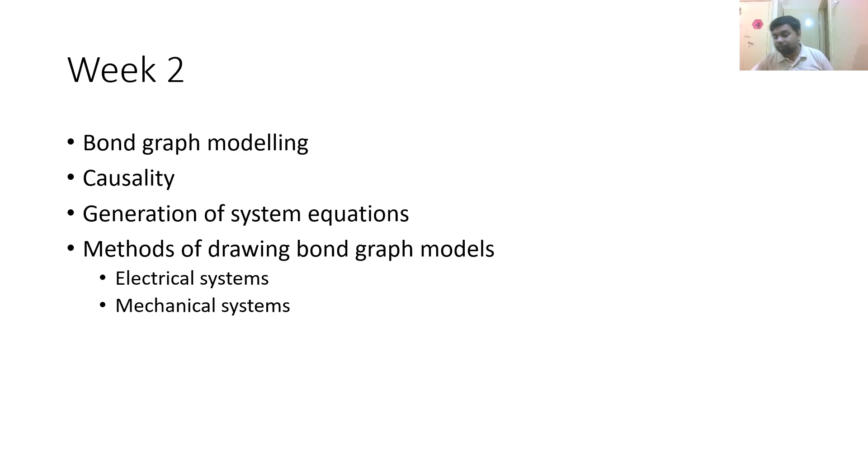In both cases, we start with a physical system and then derive an engineering model for that. From the engineering model, we try to draw a bond graph. So based on the physical engineering model of the system, we try to draw a bond graph of that. It's like a graphical representation, and we also take into consideration all the factors of causality and all those things, and then create a bond graph.

In the usual approach, we generally try to apply some of the physical laws like Newton's second law and try to derive the governing differential equations for the engineering model, and then use techniques like block diagrams, and then provide it in a format where the computer can understand.

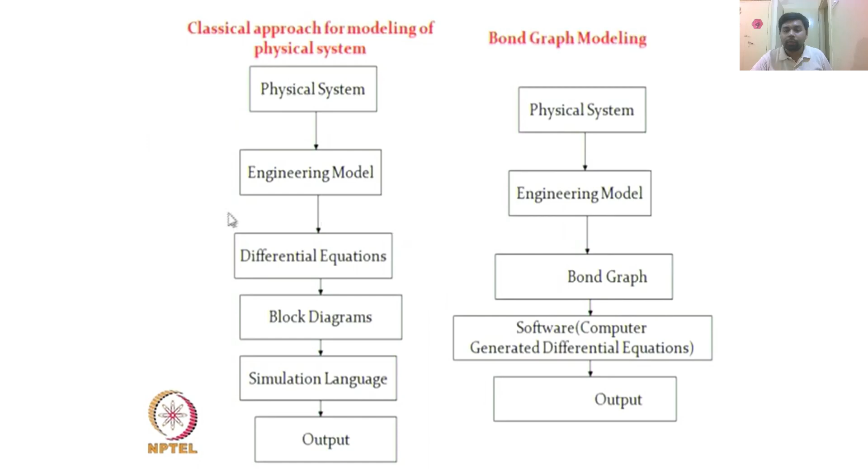There are some simulation softwares like, for example, there is a software called 20-sim, which uses this bond graph kind of modeling approach. You can try it, explore this software on your own. It's not a free software, but I think you can use a trial version at least to get some idea of how to use these bond graph kind of approaches to model a dynamic system.

In addition to that, you can also use this in MATLAB. There is a tool called Simulink, and within Simulink there is also another library which is separate, called Simscape, which is like a physical modeling kind of tool. Simulink generally uses block diagrams to create the system model, whereas in case of Simscape, we use the physical modeling kind of approach, which is similar to the way we create bond graph representation. It also has a bond graph modeling library, so it is compatible with that bond graph kind of modeling approach.

There are also other commercial tools available in the market, so these are, I think, some well known ones. You can also try it out and explore these tools on your own. If time permits later on in the course, I'll also try to show you a demo of at least one of these tools, how we can use them for modeling, and especially highlight the bond graph modeling kind of approach part of that.

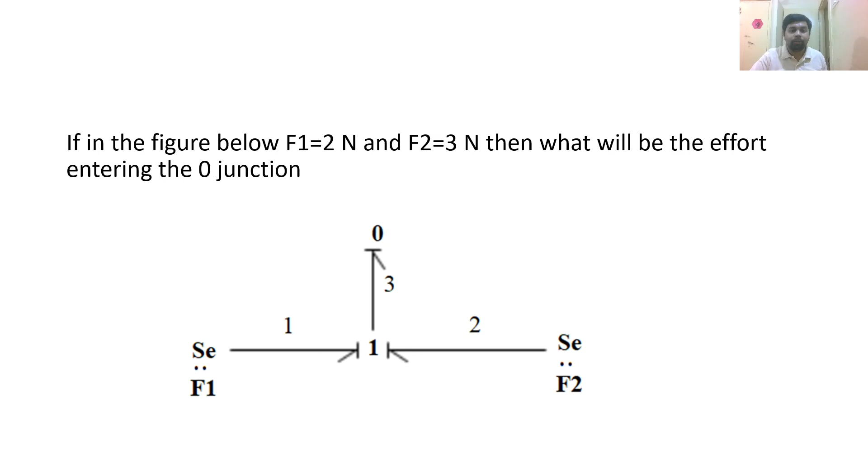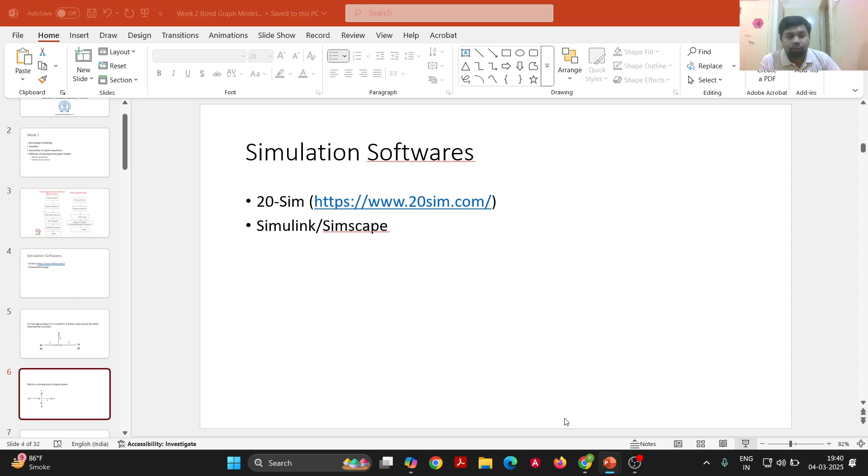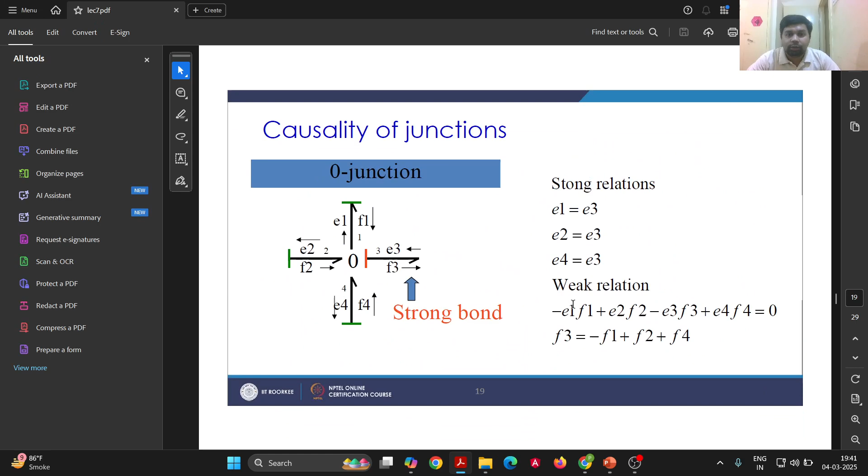Okay, so I think as per what is explained in the slides, let us just check once in the slides. So are you able to see the slides?

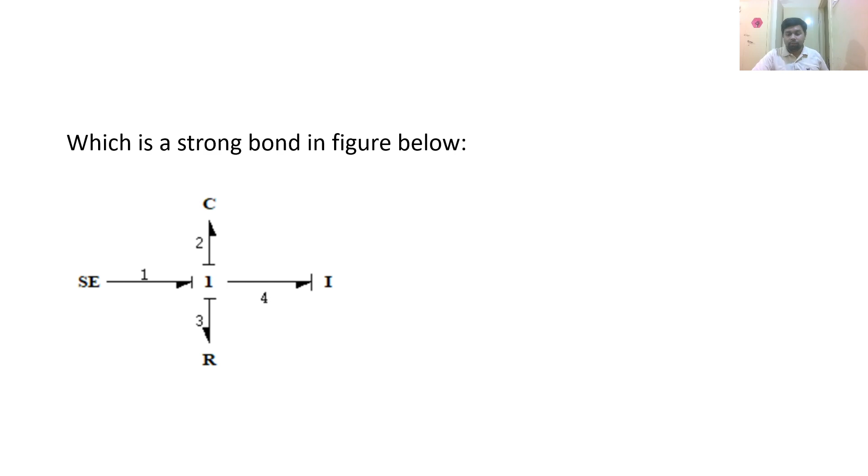And also, because of the nature of the bond graph, we can automate the process of creation of the system equations. That is, we can have an algorithm, a step by step process of creating the bond graph itself, assigning the causality, and then once we have finished assigning the causality...

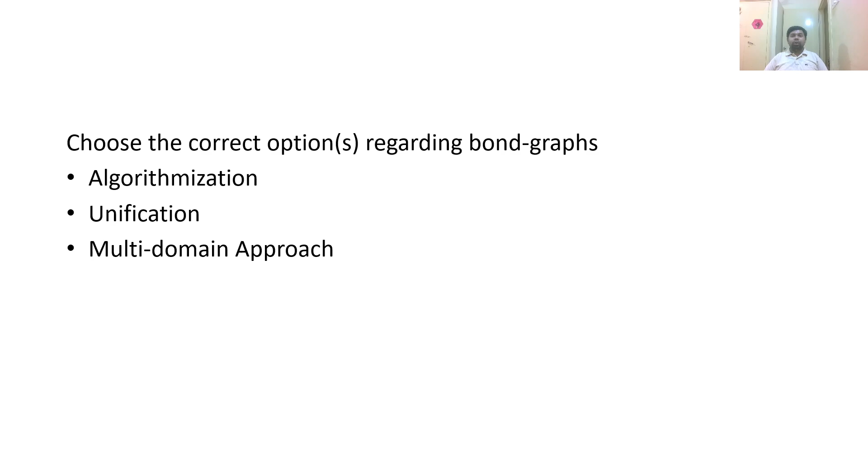Then we use the fact that effort and flow at... we first identify which are the system variables, based on which are the inductance and capacitance components, and then based on that we identify the system variables and generate the system equations. So we can automate this process, develop an algorithm, so the computer can perform these things for us. So all three things are achieved in case of bond graphs.

So we have to select based on whether the quantity is an effort quantity or a flow quantity, or it is a transformer modulus or a gyrator kind of modulus. Sir, I have no idea.

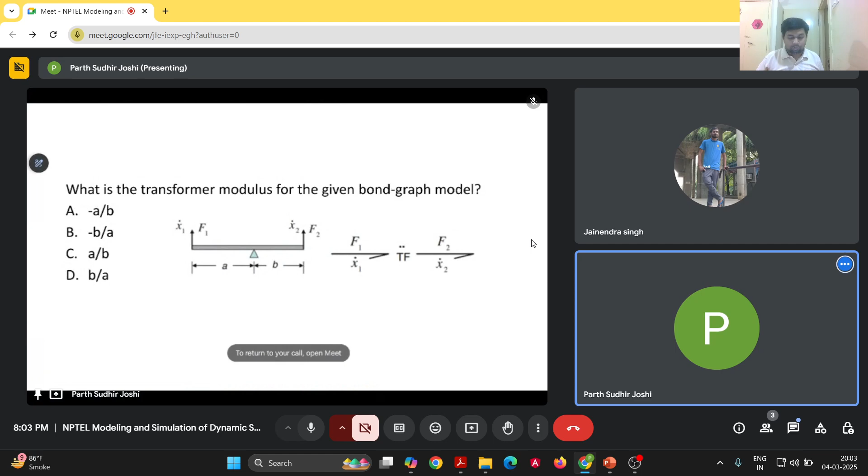I have no idea. Yeah, so when we assign the causality, we will first basically assign the causality to the source effort, because it is fixed. Then we will assign the causality to the junctions. The source effort and the source flow have fixed causality, then these junctions have fixed causality. Then the transformer and gyrator elements will also have a fixed type of causality, depending on which side the flow or effort is being calculated.

After that, we have the inductance and capacitance elements, which have preferred causality, based on the integration-based representation. And after that, last priority is given to the resistance element. So the resistance element is the one which has the least priority. Makes sense, so the resistance element will be the one which will have the least preference.

Is the PPT visible now? Yes, it is visible. Because I'm not able to see it on my screen, you will be able to see it, but in the recording it will not appear, so that will be a bit of a problem. People referring to the recording later will not be able to get access. Now I think it has appeared. Yes, fine.

So the next question is, according to the sequential causality assignment procedure, we will have to assign the causality in this bond graph shown here, assuming the resistance element is linear. We have to go one by one, and for each bond, we have to assign the causality bar, drawing the causality bar for each bond.

Now we will use the rules that I just mentioned in the sequential causality assignment procedure. First we have to assign the causality for the source first. So which are the sources here? There is a source effort, the component called SE, so that is the source effort.

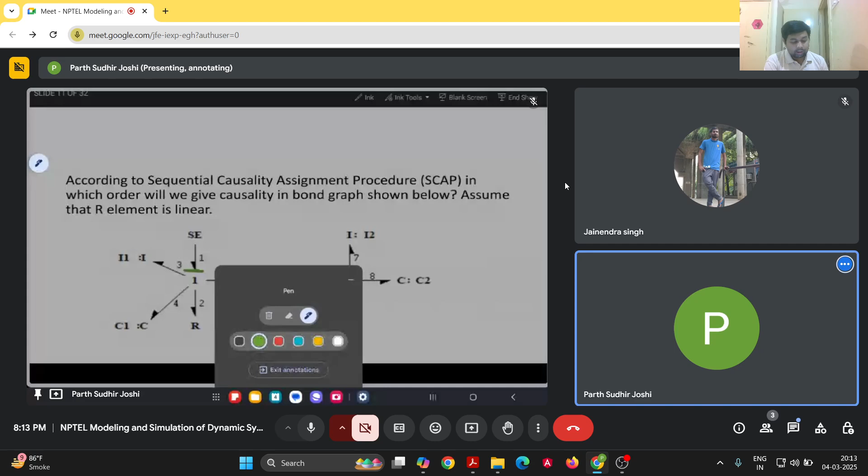Now we have satisfied the rule for the zero junction for causality. So for the zero junction we have satisfied the rule. Now for the one junction, we have 5 bonds. Out of that, bond number 3 has the causality bar on the other side, so the rest of the bonds should have the causality bar at the junction itself. Now we can attach the causality bar for the resistance element, and then our causality assignment is completed.

So basically, as we followed the rule of causality assignment, first we picked up the causality for the source effort, then we assigned the causality bar for the inductance element, then for the capacitor element, then the transformer element, and then we took into consideration the rules for causality assignment for the junction, and after that the last causality assignment was done for the resistance element. So is that okay?

Yes, sir. Okay. Okay.

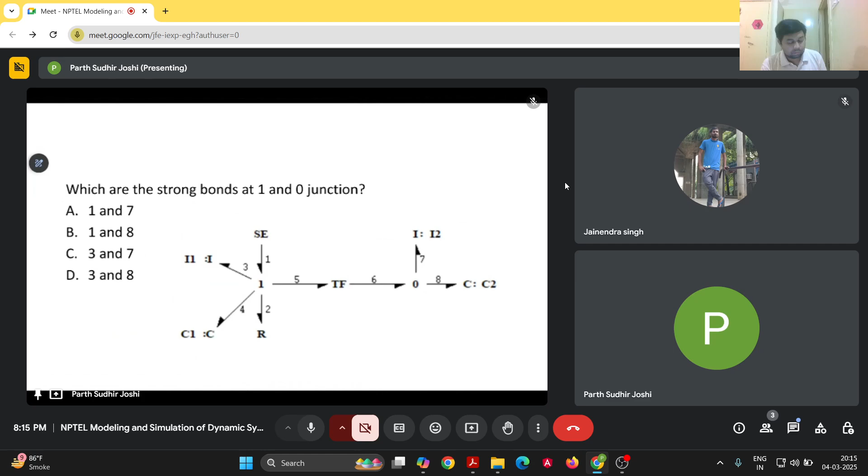So we have to now answer this question. We have to again draw the causality bars here. The question is, which are the strong bonds at the one junction and the zero junction?

Let us quickly do the causality assignment once again. First we start with the source effort, then the causality bar for the inductor element, which will be this and this, and then for the capacitance element we will assign the causality bar here and here. Now because of the zero junction, our causality bar has to be on this side for the transformer element, and on this side for the transformer element, and lastly we assign the causality bar for this one.

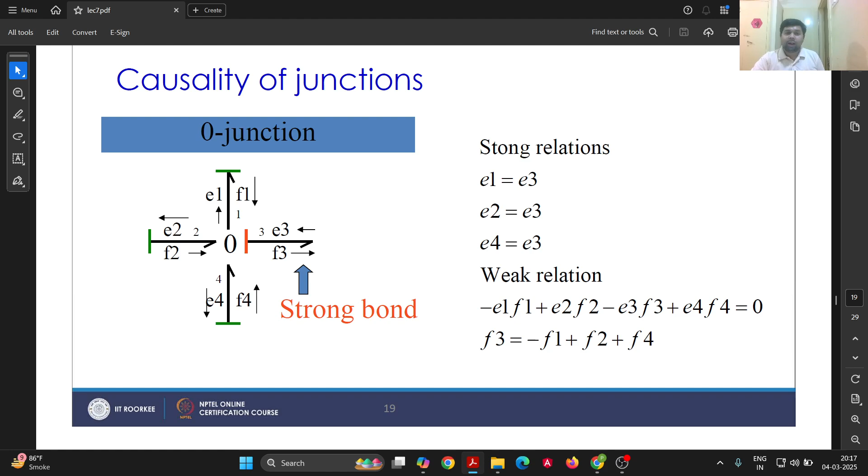Bond number 3 will be the strong bond in case of the one junction, and in case of the zero junction, actually the bond which has the causality bar on the side of the zero junction is considered to be the one.

So yeah, it's actually bond number 3 and 8. This particular bond and this particular bond, so that has to be like bond number 8 and bond number 3. So the correct answer is 3 and 8.

Now in the next question we have an electric circuit diagram, and now we have to draw its bond graph model.

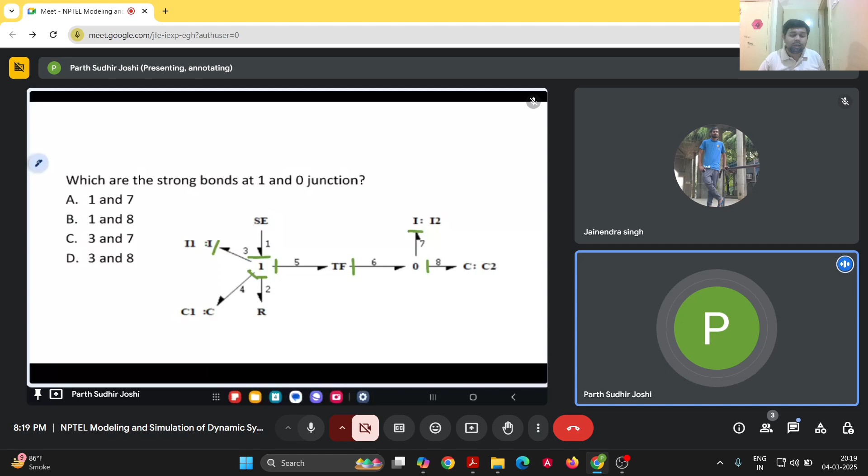So now to draw the bond graph, we first start with the source. This is a voltage source, so we have to draw which component - source effort will be the component that we will draw first.

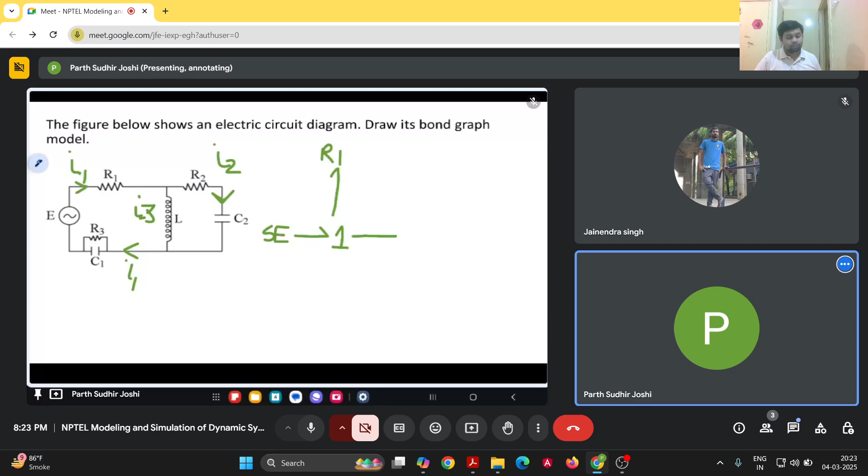And here, R3 and C1 are both basically subjected to the same voltage across both R3 and C1, so then we can represent that branch as a zero junction. So we can draw it as R3 and C1.

So the other branch which I was talking about, we can draw it as R2 and C2.

So is that correct? Am I doing the correct thing? Okay.

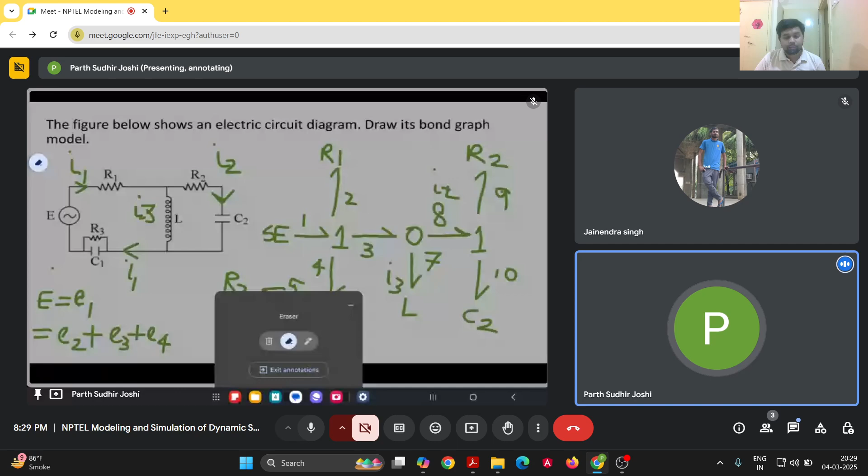Now we can start assigning the causality bars for each of these bonds. First we will assign the causality for the source effort. The source effort will have the causality on the other side. Next we assign the causality for the inductance and capacitance element. For the inductance element, we will draw the bar like this. And for the capacitance, we will draw the bar this way.

Now because we have the zero junction here for bond number 4, 5, 6, since bond number 6 has already been assigned the causality bar here, we cannot have any more causality bars assigned here. So therefore the causality of R3 should be on this side. Now if we have to assign the causality for this particular bond here at the zero junction, again bond number 4, the causality has to be this way. Now we come to the zero junction here, so we first consider junction number 1. Yeah, so basically this is how you can assign the causality bars to it, and then further.

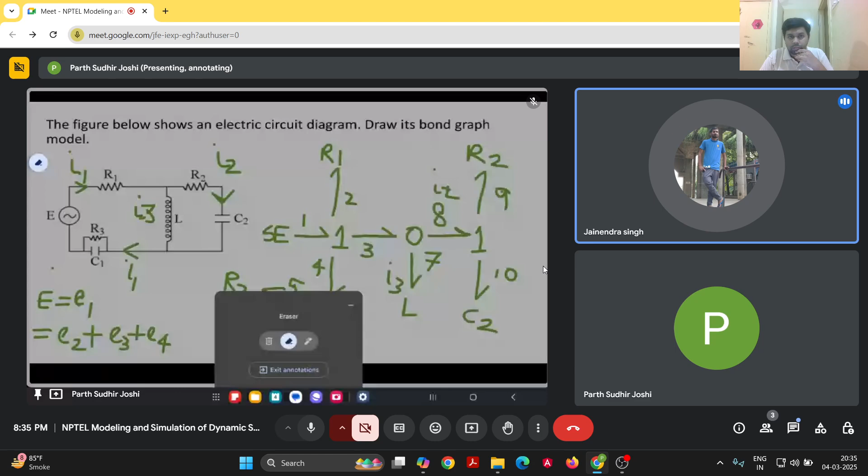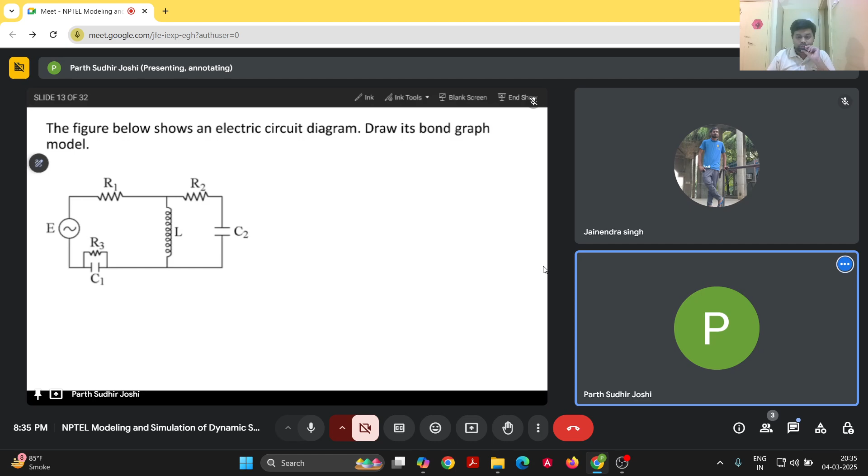So were you able to see the red colored annotations which I did for drawing the causality bars here? No, sir. I am seeing here that electrical component diagram only. No, earlier. No, I think the, okay, that has gone actually. So yeah, I think anyway we'll go to the next question.

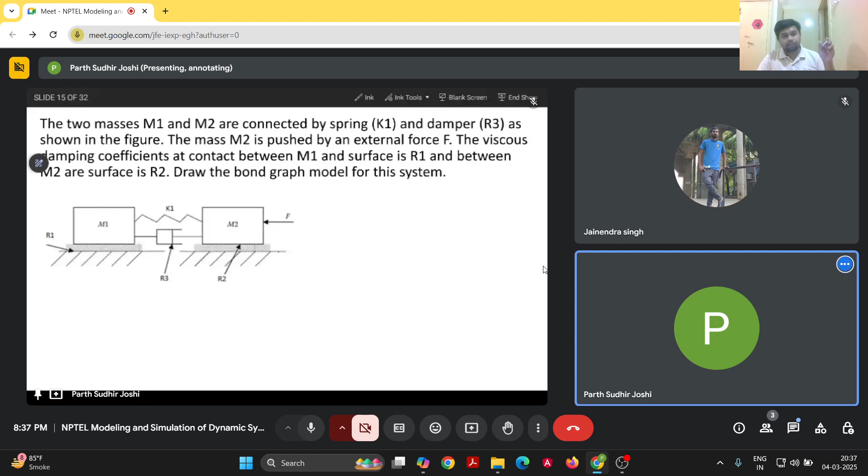So now we have to draw again the bond graph for this system. Now we start drawing the bond graph here. We can see that there are two masses M1 and M2 and there is a spring. They are both connected by a spring K1 and there is a damper R3 connected. And there is friction R1 and R2 acting between the surface mass and the surface. So now how do we start this diagram? First we have to start with the source. So there is a source effort over here. Because force F is applied, we can start with the source effort, where the effort is F.

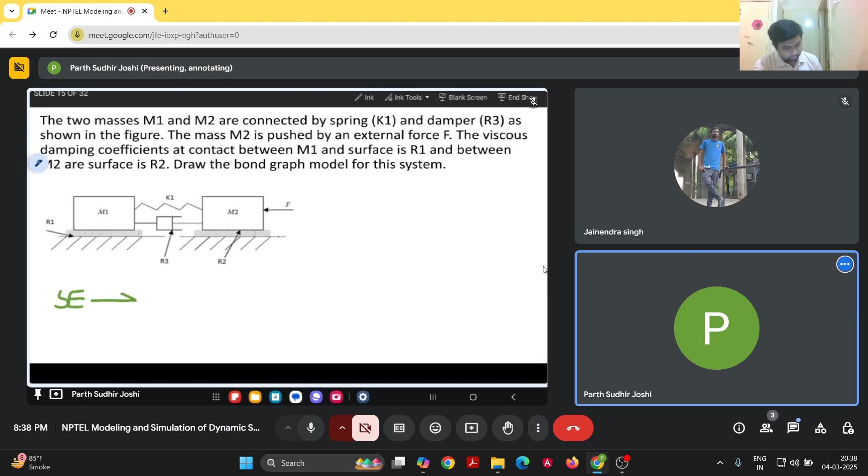And then next we have the mass M2 and the spring, the damper R3, and this resistance R2 here. So all of them have basically a common velocity. So then we can represent all these things by one junction. We can use one junction to represent these things like so. First, let us draw the bond for resistance R2.

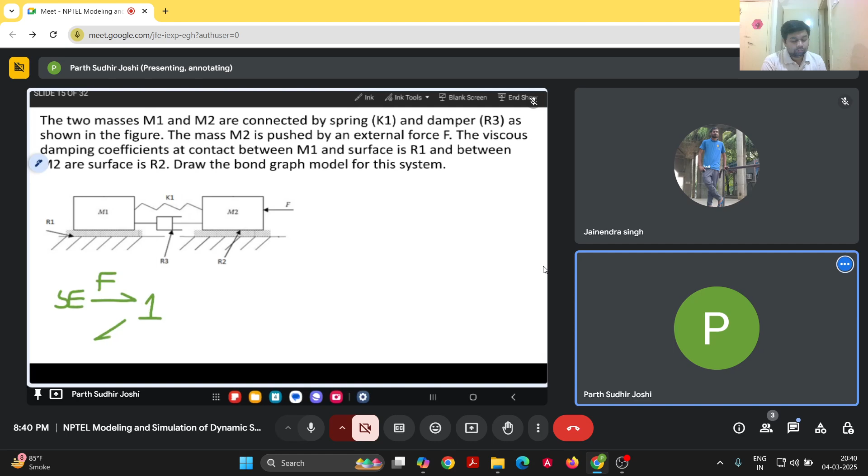And then the other component will be R3. And then we will have to use a capacitive element which has the spring constant K1. And there will be the inertia element M2.

I think I should draw this on a new page because there is less space here.

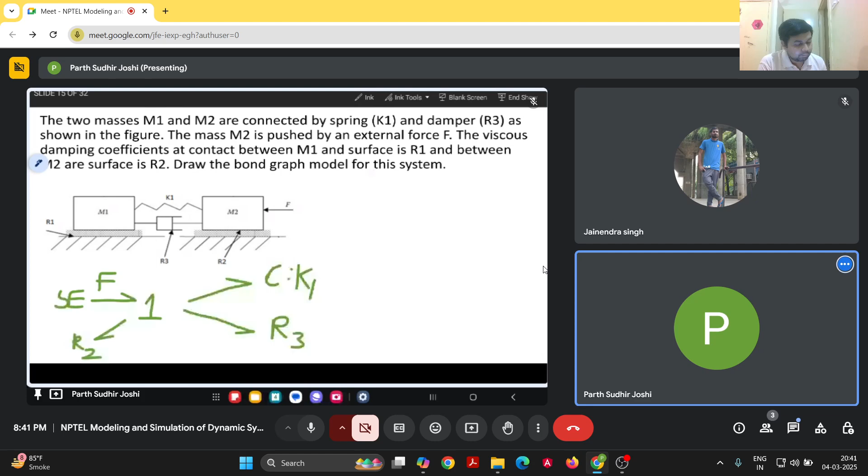Let us start drawing the bond graph again. So we start with the source effort. Then we'll use an inertia element M2. Then the capacitance element for spring K1, and another resistance element R3.

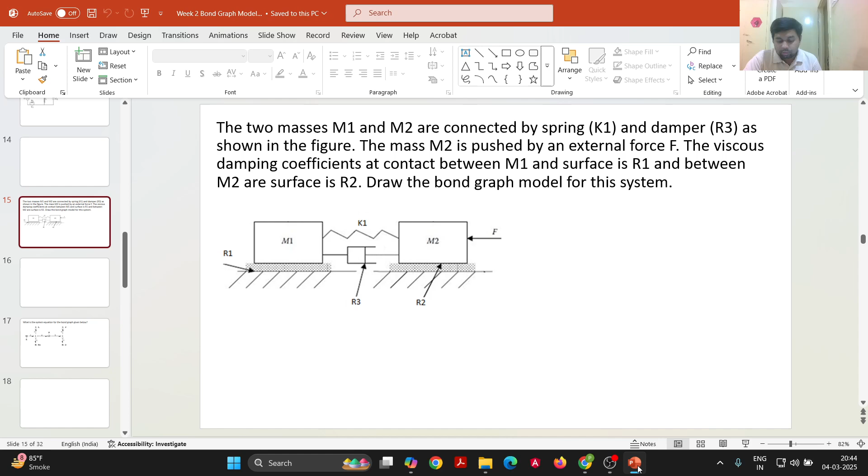Now the other end of K1 and R3, the springs K1 and R3, they are also connected to the mass M1. So now we have to use another one junction because they will have the common velocity, and the component R3 is also connected here on this one junction. Then we will have to draw another bond to represent the friction R1, and finally the inertia M1 to represent the mass M1. So this is where we can draw the bond graph for this system.

Now we can assign the causality. So for the source effort, we will draw the causality here. Then for the inductor element, we will show the causality here. For the capacitance, we show it here. For the inductance, again here we will show it here.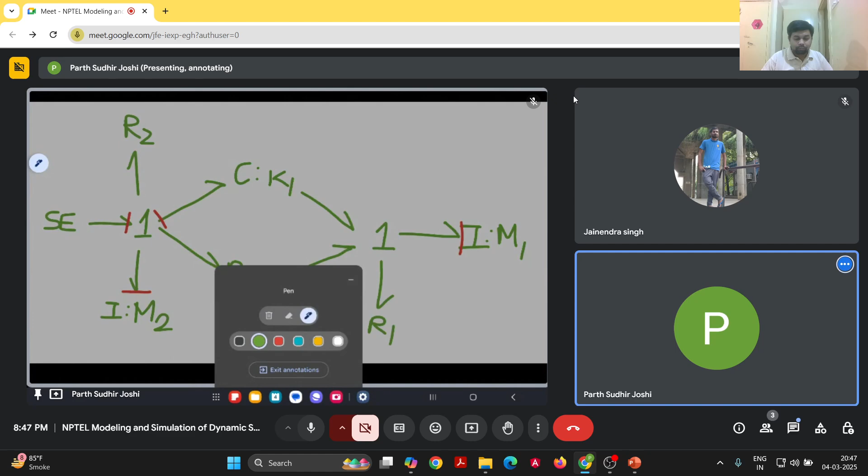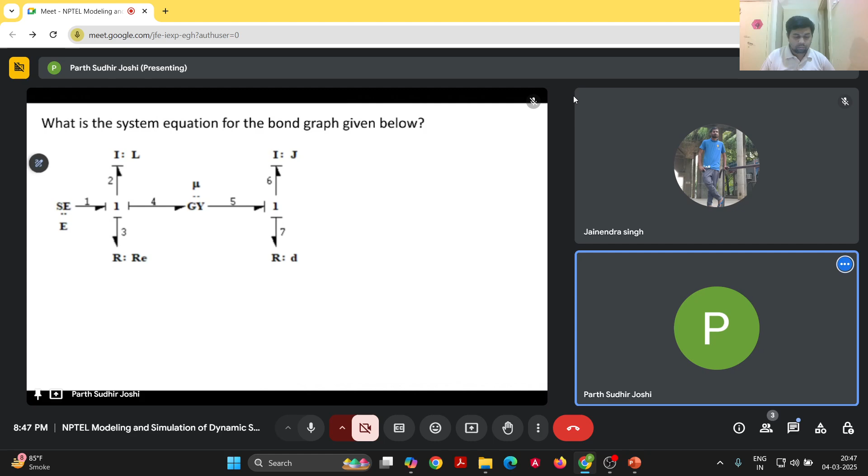So now let us move to the next question. So now we have been given the bond graph here, and we have to basically derive the equations of motion from this particular bond graph. So now for that, the bond graph is already complete with all the causality bars assigned, and then what we have to first do is identify what are the system variables.

So to identify the system variables, we have to basically identify which are the inductance and capacitance elements here, and then use the P and Q variables, which are basically the integration of the effort for the inductor element. So it's basically the integrated effort, which is the P quantity, and the quantity Q for the capacitance element, which is the integration of the flow variable.

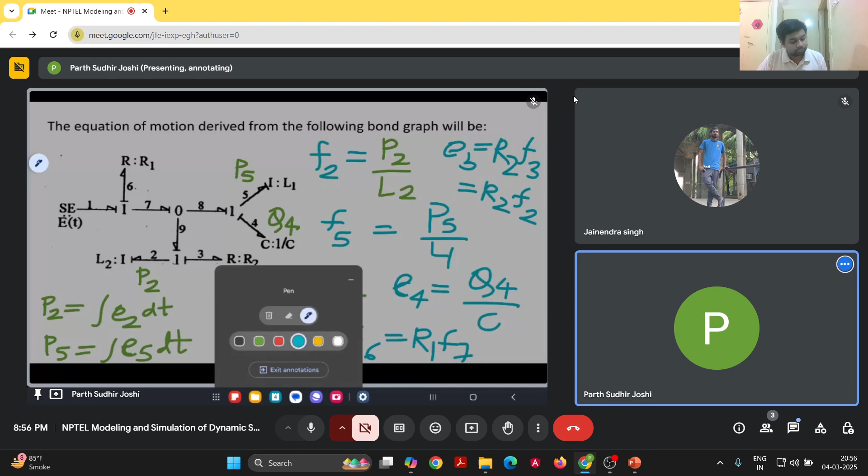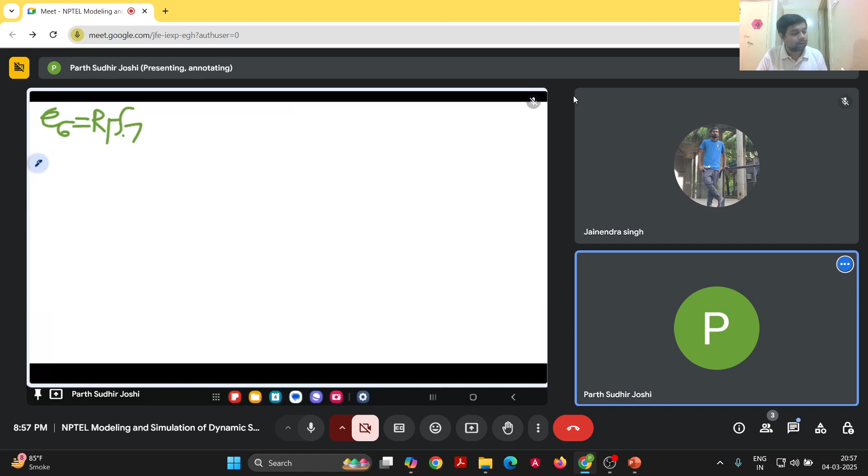So E6, as we said, is equal to R1 into F7, which is equal to R1 into F8 plus F9.

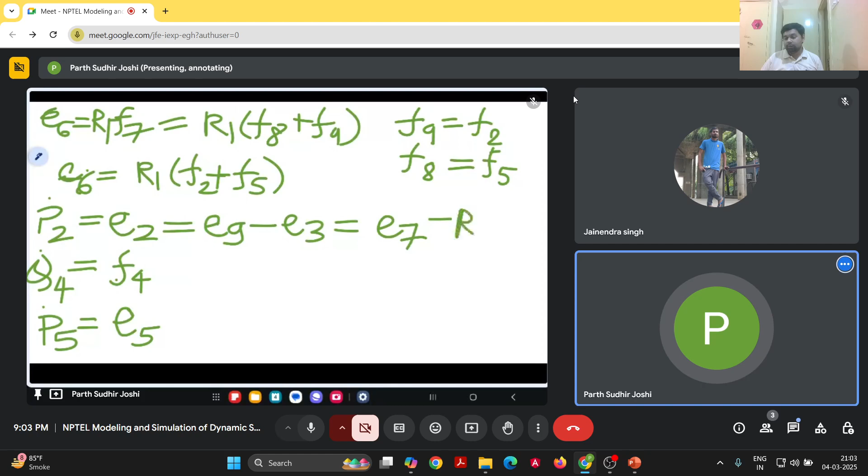And E7 we can write as E1 minus E6, because it's part of the one junction. So we can write it as E1 minus E6 minus R2 F2, and E6 also we just calculated here as R1 into F2 plus F5. So E6 is known, R2 F2 is known, E1 is also known because it is the source effort. So we basically got the equation for P2 dot.

Now similarly we have to do the same thing for Q4 dot. So Q4 dot is F4, which is the flow variable here, and it is the same as the flow variable because it's part of the one junction, so F4 is equal to F5. And F5 is already known to us, so it is calculated. So we got Q4 dot in terms of F5.

And then our next step is to calculate what is E5. So for E5, it is part of the one junction, so we can write it as E8 minus E4. And since 8 is part of the zero junction, E8 is equal to E7, so we can write it as E7 minus E4, and E4 is already known to us, which is Q4 by C.